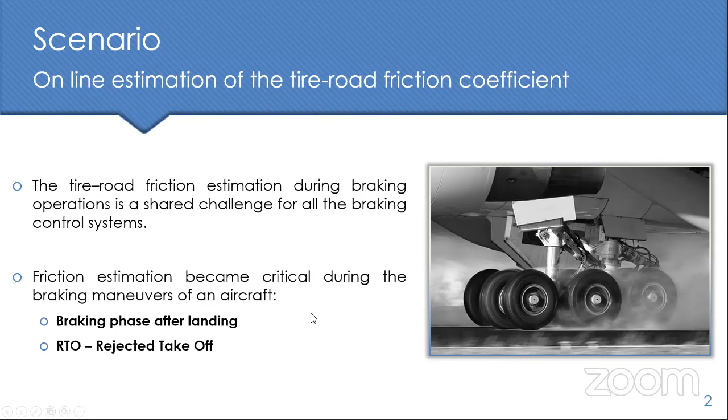So to define our problem, first we pay attention to the friction model. In the literature, the wheel friction model assumes that the longitudinal tire force is given by the product of 2 main components, a nonlinear function mu(lambda) and a vertical force Fz acting on the center of the wheel. So for the sake of the estimation task...

The tire model can be simplified starting from 2 main hypotheses. The first is that during the braking maneuver, the motion of the airplane occurs along a straight line, which has the same direction as the runway. And usually the brakes are located on the rear wheels of the airplane, so there is no direct steering.

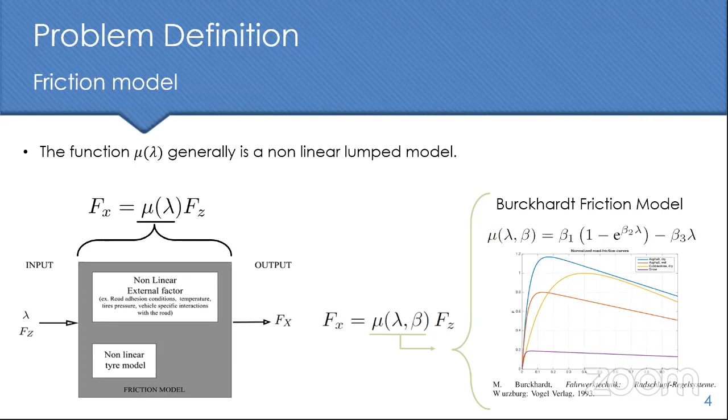Generally, the function mu(lambda) represents a nonlinear lumped model for all the phenomena characterizing the actual road tire friction. In particular, in this case, we use the Burckhardt friction model, which depends on the variable lambda, the longitudinal slip value, and which is parameterized by 3 different betas. Usually the Burckhardt friction model describes 4 different road conditions: dry, wet, cobblestone, and snow.

And finally, to define our problem, we also used the quarter car model, just for the sake of the estimation problem, to model the aircraft's dynamics during the braking phase.

And referring to the Burckhardt friction model, we also define the longitudinal slip, which is a variable that is bounded usually between 2 values, 0 and 1. 0 means there is no slip, and 1 means that the wheel is locked.

It depends on 2 main speed measurements: the aircraft speed and the wheel speed, coming from the aircraft sensors. So remembering the shapes of the Burckhardt curves, which have a local maximum, we define the optimal friction value, the maximum value for a given friction curve, and the optimal slip value, the associated slip value.

So we wanted to design a real-time algorithm yielding the estimate of lambda star, which is the optimal slip, using the measurements of the two main velocities, the aircraft speed with respect to the ground, and the wheel speed.

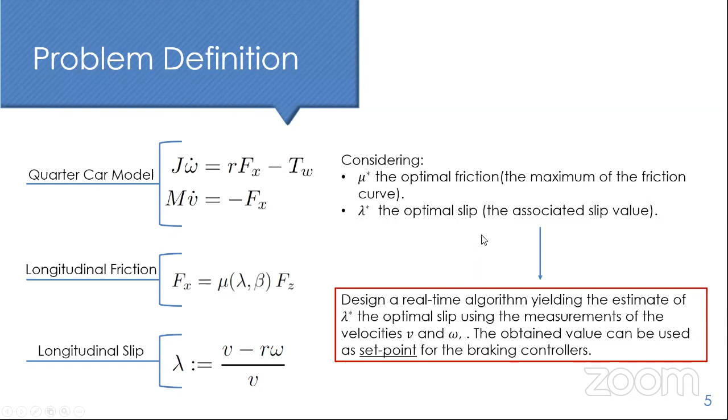And of course, the obtained value can be used as a set point for the braking controller in a closed loop scenario. To do that, we use this estimation scheme where the core of the estimation block is an artificial neural network, in particular the multi-layer perceptron regressor.

We collect during real-time operation a set of pairs lambda-mu, collected during braking operations. This is possible through the knowledge of the two speed values coming from the aircraft sensors and by performing a model inversion. And the idea is that if the relationship between lambda-mu pairs and the surface, which is unknown, can be captured, it's reasonable to extend the estimation function to predict the optimal slip directly.

And of course, the availability of the optimal slip estimates allows us to benefit from a slip controller scheme. In fact, the predicted value of the best slip coefficient can be used as a set point for the controllers.

In this case, we analyzed two different regulators, the PI regulator and the sliding mode controller. The aim of these regulators is first to limit the braking effort requested by the pilot, and then to keep the slip value at the set point, which is the lambda star coming from the MLP.

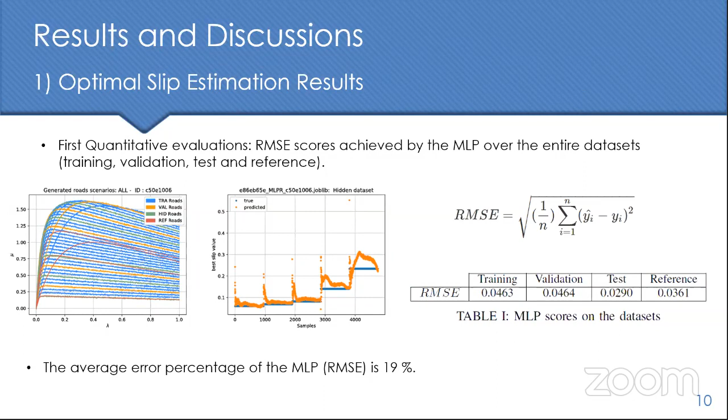Talking about the first test, this is a quantitative evaluation based on the root mean square error scores achieved by the MLP over the entire dataset and subsets: training, validation, test, and reference. From Table 1, the obtained results show that the MLP estimator is able to generalize, since the test and reference sets are excluded from the training phase, and the reference dataset contains only the Burckhardt default roads: wet, dry, cobblestone, and snow. The overall performance for the test and reference datasets is higher than that obtained for the training and validation datasets. In general, the average error percentage achieved by the MLP is around 19%.

For time reasons, we report only the closed loop results.

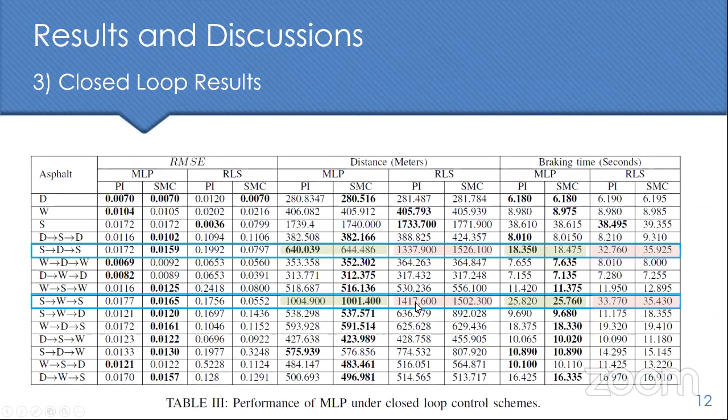To wrap up, this work proposes a data-driven strategy to estimate the optimal slip value and perform efficient braking control. We used an artificial neural network, in particular the MLP, and proved that it can efficiently detect road conditions by processing sequences of slip friction pairs. The synthetic experiment results also show that the proposed approach achieves better performance, in a synthetic environment, compared to the state-of-art recursive least squares approach.

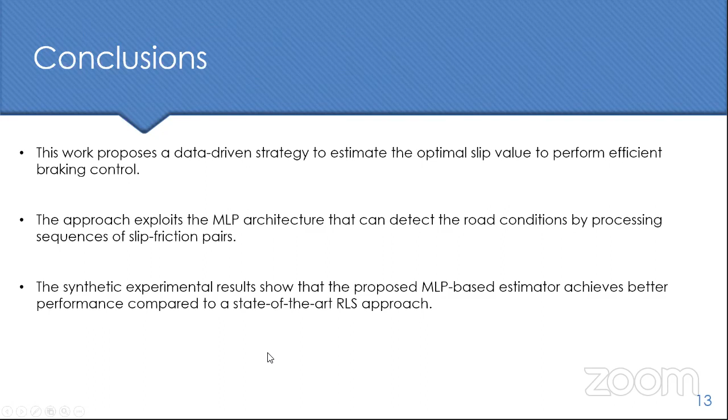Thank you very much for your nice presentation. We finished a couple of minutes in advance of the scheduled time, so we have almost 6 or 7 minutes for questions. Is there anyone who wants to ask questions? So for now, no questions. I have one or a couple of questions. Can you hear me?

Regarding the PI and sliding mode controllers, you don't have a mathematical model of the system. So the question is related to how to tune the controllers. In particular, regarding the PI controllers, probably a heuristic, trial and error approach has been used.

Yes, for the sliding mode controller, we followed the approach used by Riccardo De Castro, who used the sliding mode controller for the recursive least square strategy, and we used the same configuration he used. For the PI controller, as you said, we used an empirical method. That's because the idea is to use this regressor and approach for an estimation task, like a smart sensor.

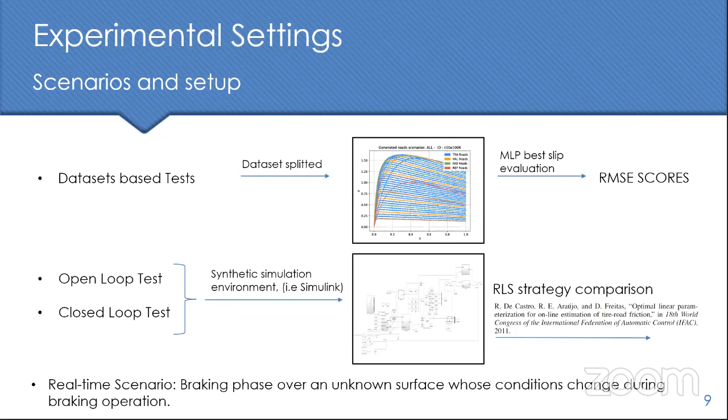Of course, in future work we'll analyze the impact of different configurations for the controllers. Because, for example, the spikes come from both the training phase transitions, and the controller can of course improve or decrease the overall efficiency of the estimation, because they are connected.

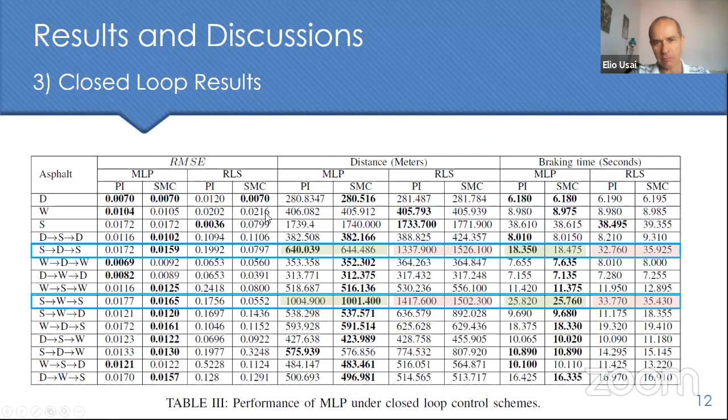My question was very similar to yours regarding the differences between the controllers, since I almost see no difference between PI and sliding mode. So my question was, what is the sliding variable and what is the error signal for the PI? Because it's not strange that two so much different controllers have such similar behavior. So that was my question and my doubt in the presentation, very similar to that of Lino.

Yes, I think we tuned our PI controller to reach the same results as the sliding mode controller, but I think the results came from the environment simulation, because the model is very simple - we use the bicycle car model, and we also use only a white Gaussian noise for training the dataset. So we don't add noise that could probably show better the difference between an approach with the sliding mode controller and the PI controller.

So basically it's the same. And of course, the initial brake effort requested by the pilot is kept equal and constant for all the simulation. Probably in a more detailed and complex simulation, where the braking effort requested by the pilot may change, we will see a stronger difference between the sliding mode controller and the PI controller. And of course, this is a synthetic simulation just to show the estimation capabilities of this approach.

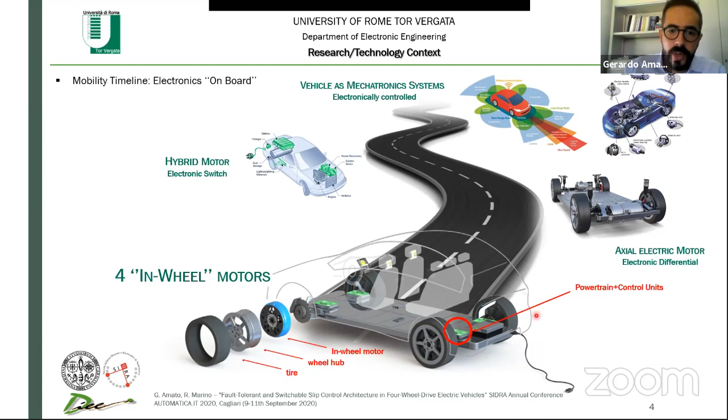On a virtual timeline, starting from vehicles with mechanical parts electronically controlled, like the steering or the throttle, the electric powertrain moved ahead through hybrid motors until other configurations with one or two traction motors, for example. The technological edge in the automotive industry is reaching the configuration with 4 independent electric wheel motors. They are so called because they are exactly housed inside the wheel hub with its own independent powertrain control unit coupled, which is the configuration we considered in our design.

Generally speaking, a fault-tolerant control design is placed in the frame of the robust regulation problem. At the system layer, the goal is to cope with some actuator or sensor faults as disturbances. The problem of nominal performance saving during the failure is addressed sometimes by actuator grouping, in which once a generic fault is notified, the controller arranges the driving forces to the residual actuator control set, like in this case on the front axle.

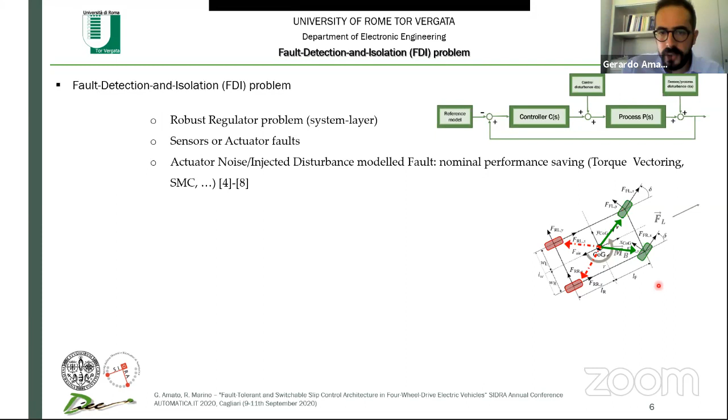Several existing fault detection techniques are based on the loss of control effectiveness as a fault indicator. A wrong characterization can lead to missed detection or false alarm problems, as surveyed in Dumont. Then estimation skills of control algorithms are useful for this goal and can usually be exploited.

Sometimes the fault is a state variable to be observed. In some others, like in Marino 6, the motor parameter identification is used to isolate the fault, which is asserted when that parameter, for example the stator resistance, is out of acceptable bound in the parameter estimation.

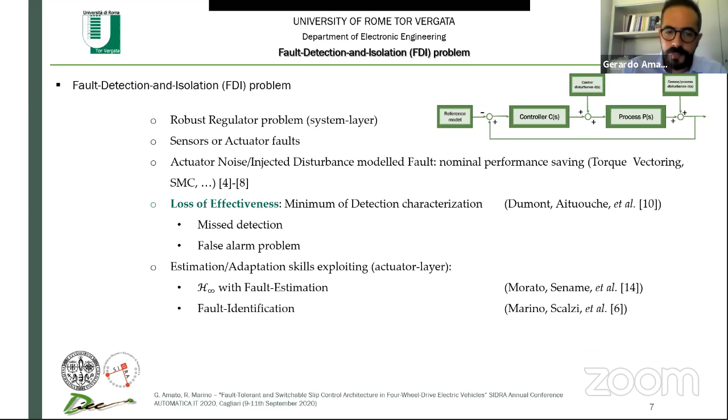An attendant problem thus is the reconfiguration practice of vehicle trim due to the fault. In Cato, a solution for a switching mechanism for 2WD is patented for combustion vehicles, where the mechanical transmission from a central engine can optionally switch between different transmission states by connecting or disconnecting configurable reduction differential gears with electronically controlled switches.

The idea behind our work is to exploit the intrinsic robustness of the 4 independent controlled wheels to implement two main features for the controller towards the preservation of nominal torque balancing. The first is a quick fault detection and isolation capability, FDI, and second, an integrated smooth switching function, SS, from 4 in-wheel motors to 2 in-wheel motors cases once the fault is identified on the axle.

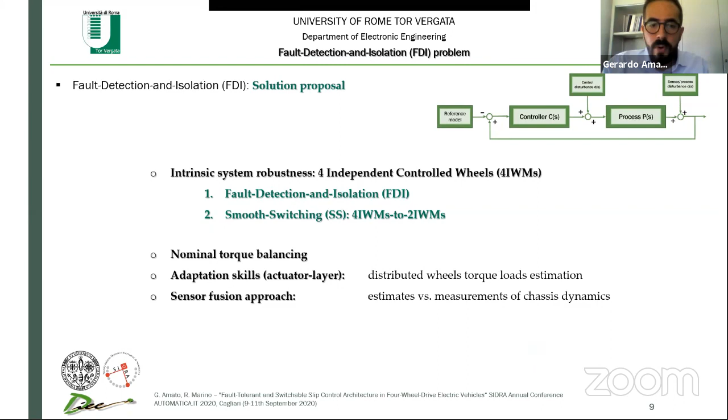Adaptation skills of the actuator layer are used to perform a sensor fusion approach as follows. The model considered for the control design contains the 3rd order XYR dynamics plus the 4-wheel speed dynamics omega, with the forces modeled using the Pacejka magic formula.

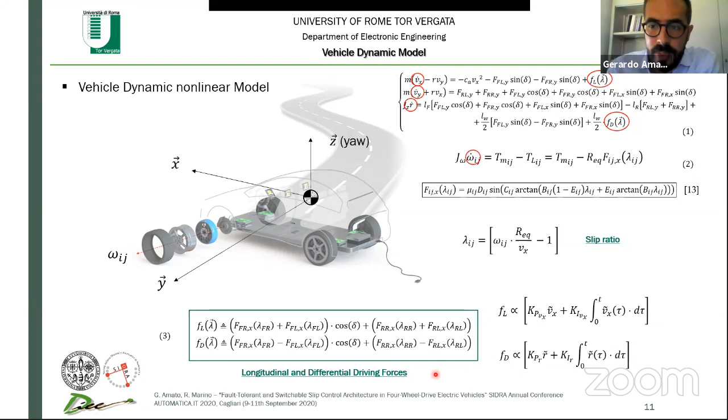From the cooperation of the 4 in-wheel motors, 2 force terms appear as PI controllers, respectively at the longitudinal speed equation Vx and at the yaw rate dynamics R, namely FL and FD, the longitudinal and differential driving force contributions respectively. The sensors in the system are 2 accelerometers to measure X and Y acceleration, a gyroscope for the yaw rate, and 4 encoders for the 4 wheel speeds.

The proposed strategy is borrowed from the multi-layered architecture of Amato Marino 3, in which 2 additional links between the extreme layers branch forward the FDI-SS selectors for the fault detection task. The algorithm works as follows.

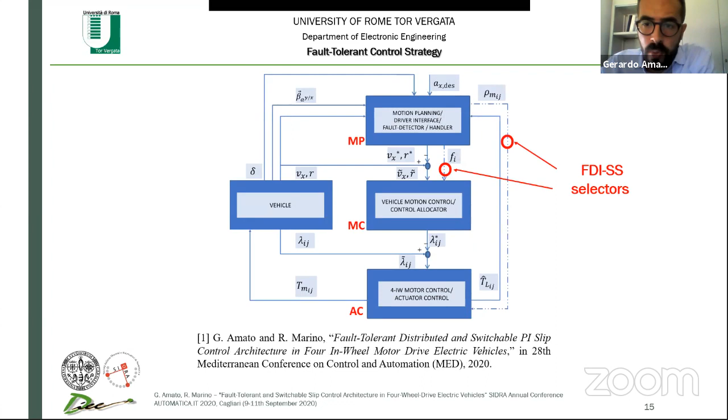At the lowest layer, the 4 independent actuator controllers work as the in-wheel motor controllers. Each individual slip controller produces 2 decoupled input currents, ISQ and ISD, to the rotating frame model of the wheel motor to control both the motor tracking of the slip lambda and the magnetic flux psi RD references.

In Amato Marino 3 the slip control stability was already proved, so that the resulting electromagnetic torque TMIJ implements a PI loop on wheel speed dynamics, and at the same time, by providing the integral part, the estimation of load torque acting on the wheel at runtime in order to compensate it.

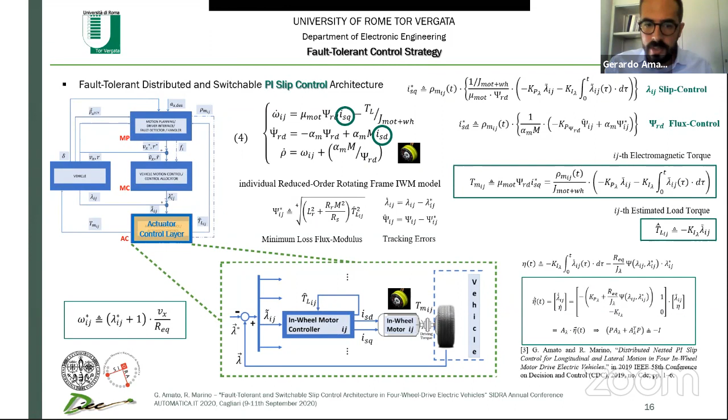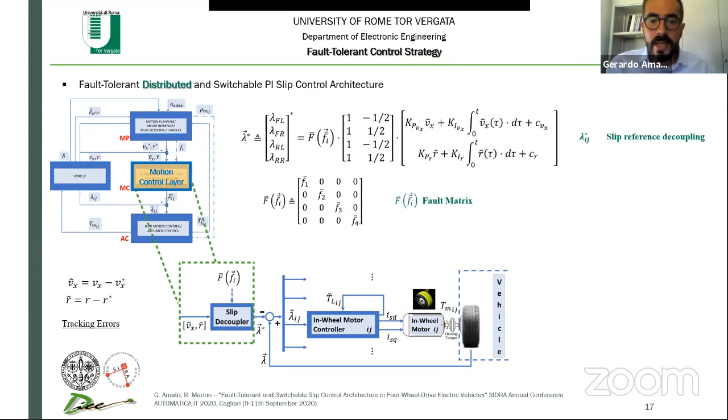The slip references are given by the motion controller MC at the intermediate layer, in which a slip decoupler produces 4 lambda IJ star references with an equalization of the 2 longitudinal and lateral force controllers, respectively the PIs on Vx and R errors, depending also on a fault matrix F, which acts as an insertion matrix.

At the motion planning layer, the algorithm works in two phases. The first phase is the FDI, fault detection and isolation, in which the fault is detected and isolated on the basis of a sensor fusion. The difference between the measured acceleration vector beta and the vector of transferred load gamma is evaluated.

Gamma is calculated from the mapping of individual estimated load torques on wheel through the estimated force vectoring, and then the two accelerations result in the estimated acceleration. Once the fault is detected, a mutual comparison between coaxial twin wheels leads to understanding rapidly on what axle the fault is located, for example, by a mutual comparison between the rear load torque.

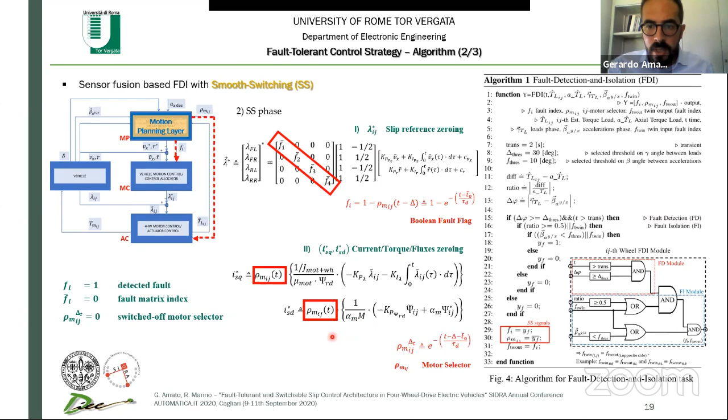The second phase is triggered when the fault is detected and the smooth switching function works. The branched FDI SS selectors are generated as exponential signals. At first, the fault boolean flags FI act as a slip switching signal, so that the detected fault produces a zero index in the matrix where the fault is, while the corresponding control currents are switched off by the rho IJ selectors.

The selected scheme for FDI tasks results quite fast due to the relevant rolling load transfer on coaxial wheels, so that the imbalance on coaxial wheel load can indicate a problem, as well as unexpected saturation or slipping. The detection robustness is entrusted to the redundancy of decision-making flags. In fact, the three decision layers are related to three hierarchical AND gates based on global and local variables, respectively.

On the chassis layer, we are looking at the difference between the measured acceleration vector and its estimate. On the actuator layer, we are looking only at the comparison of wheel load estimates.

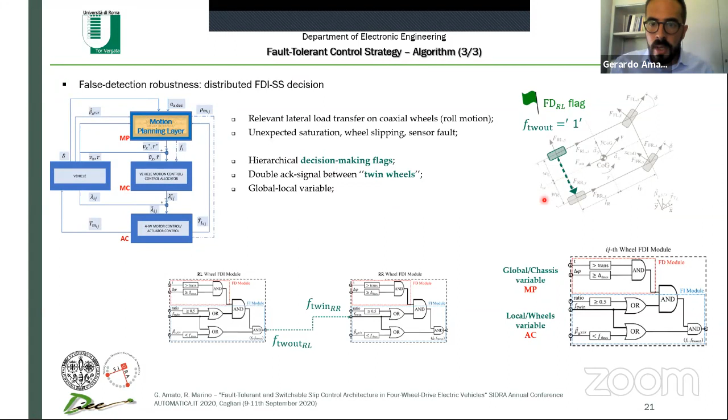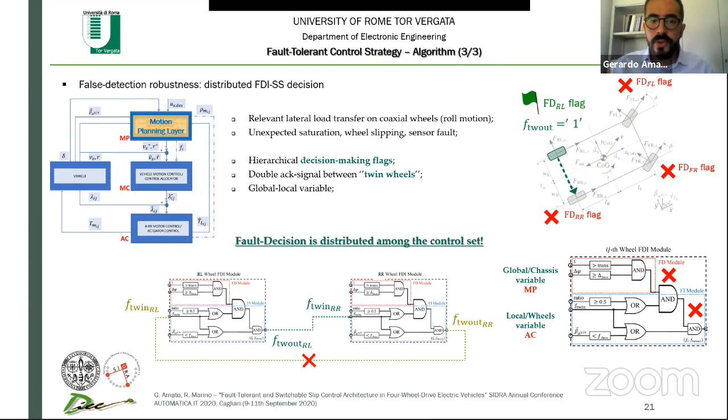An example: some software errors could produce a fault flag on a wheel, which communicates the error to its twin with an F twout output. Even if this could indicate the error occurrence, the fault event is not triggered if at the aggregate decision layer, the global fault detection flag is not agreed by all FI modules, thanks to the hierarchical ANDs. Then the fault decision is made distributed among the control set.

The proposed control strategy is validated with a CarSim simulation of a vehicle cruising at a constant speed on wet asphalt. We considered a generic mechanical fault designed as a sudden incoming loss of load on the rear left wheel, which the motor should compensate. The fault produces a sigma scaling factor appearing on the wheel torque down to 20%, due to an angular or linear miscalibration, for example.

The test is conceived to show the rapidity of intervention of the FDI and switching routines from 4WD to 2WD cases, once the fault is isolated on the rear axle.

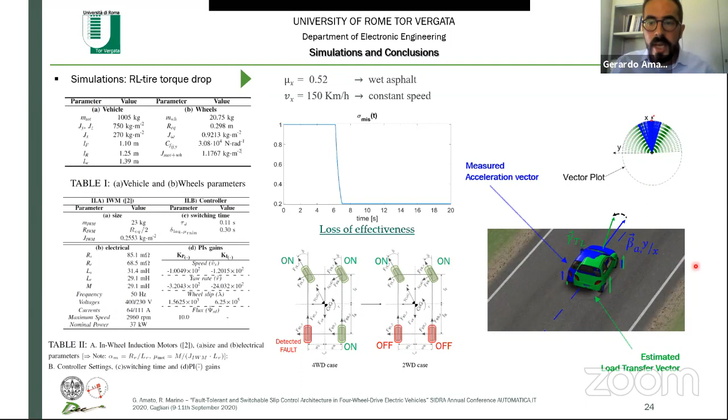The fault detection task every time looks at the difference between the measured acceleration vector, the blue one, and its estimate, the green one. These are two independent vector acceleration evaluations which must agree. At the beginning, they are aligned. So when the estimated acceleration vector goes out of an acceptable cone, an acceptable range around the measured one, it means a fault occurred.

In this short video, the blue vehicle, which is the real one, is cruising, while the green one represents only an estimation of the heading motion. At the fault occurrence, the estimation falters, and so the estimated vehicle heading moves sideways.

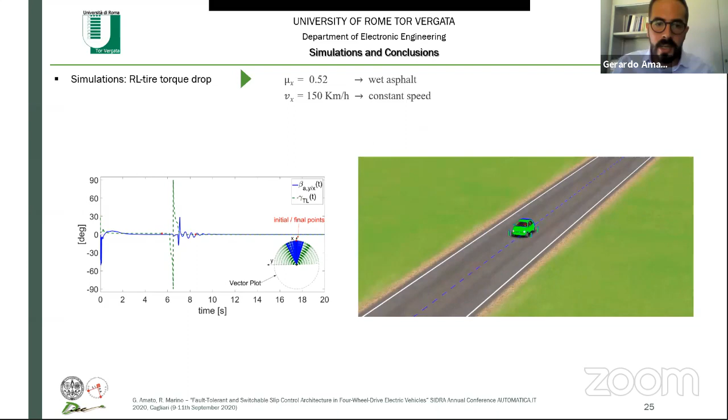This is because the faulted angle gamma, the green one, is spanning in plus minus 90 degrees, while the measured vector beta, the real one, is inside only plus minus 30 degrees. Then the two vectors coincide again only when the system recognizes the actuator failure, like at the end of the video, and after it transfers all the powertrain onto the front axle. Then the vehicle balancing is restored again at the end.

Step by step, the algorithm works as follows. At first, the fault is detected when the acceleration vector estimation error crosses 30 degrees.

Then in the fault isolation task, the modal ratio between coaxial load torques are polled. When at least one ratio crosses 50%, or a wheel receives as input an F twin equal to 1, the fault is isolated on the axle. A last check is done on the acceleration vector angle beta to understand if the load imbalance is caused by a steering maneuver. In this case, there is not a steering maneuver, and then the fault is accepted.

Finally, the SS signals are triggered at the same time on the twin rear wheels, rear left and rear right. Then the fault indicators are zeroed in the matrix, as well as for the current parameters, motor selectors. Thus, the rear slips, the rear currents, and the rear fluxes of the motors are zeroed.

And then the motor torques are zeroed for the faulted wheels. The cooperative architecture allows transferring the control action transparently from 4WD to 2WD, thanks to the integral contributions, without the need of reconfiguration. The integral action will then automatically find the new operating condition, so the torque value of residual control set is augmented for the front wheels in order to compensate the loss of the two actuators.

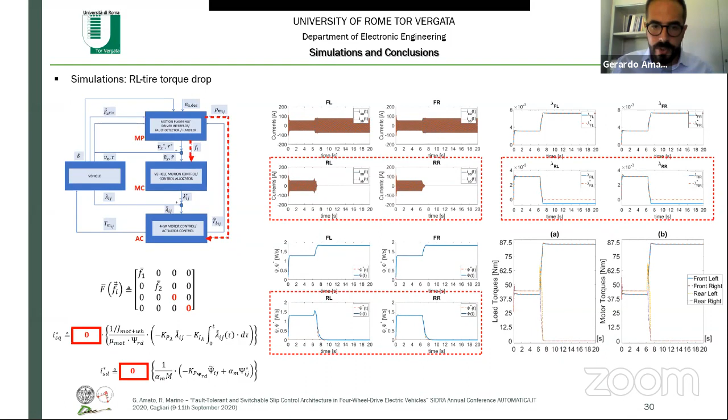Consequently, chassis motion tracking, viewed as the nominal performance target, is preserved without perceivable macroscopic effects. As you can see, there is a very small error.

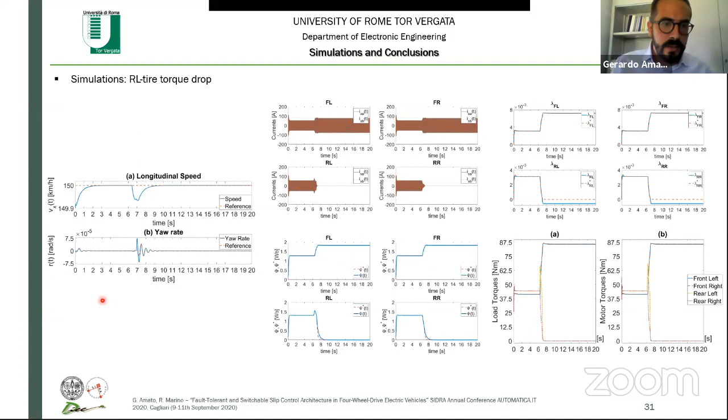In conclusion, the work deals with failure detection and isolation in a four-wheel motor configuration with distributed and switchable architecture. The independent 4PI slip loops provide cooperative chassis motion control and distributed load torque estimation. A sensor fusion approach is used for fault detection by observing the difference between the measured vehicle acceleration and its estimate. Then the four estimated load torques at the motors are mutually compared so as to identify quickly a mechanical failure on the axle in less than 1 second, while the switching command is given in 0.1 second.

Namely under typical driver reaction time. The failure is shown to slightly affect the longitudinal speed and yaw rate, but the control is capable of quickly compensating it.

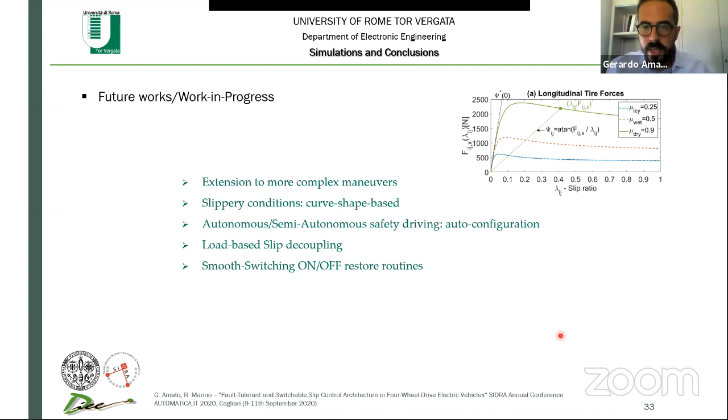As future work, we consider extending the test to more complex maneuvers like a bending maneuver or acceleration or braking, while the distributed wheel load estimation allows us to depict the wheel curve shape by combining slip and torque information. The auto configuration features could lead to interesting applications in the frame of autonomous or semi-autonomous driving.

A load-based slip decoupling could be considered to improve the vehicle road grip in the case of a different torque balancing during a curve or during an acceleration. Finally, the switching ON/OFF restore routine can be implemented too when the estimator recognizes the fault.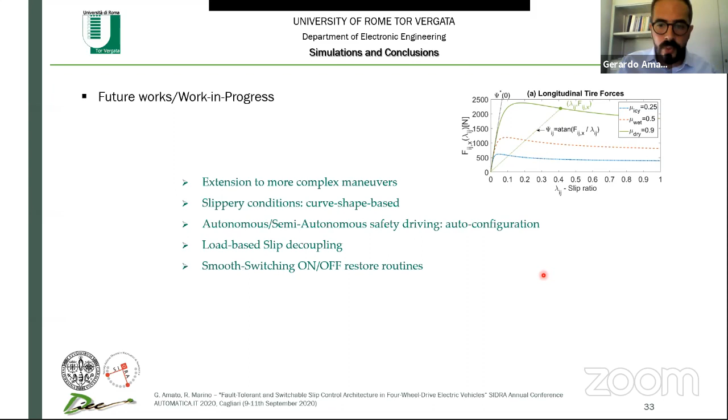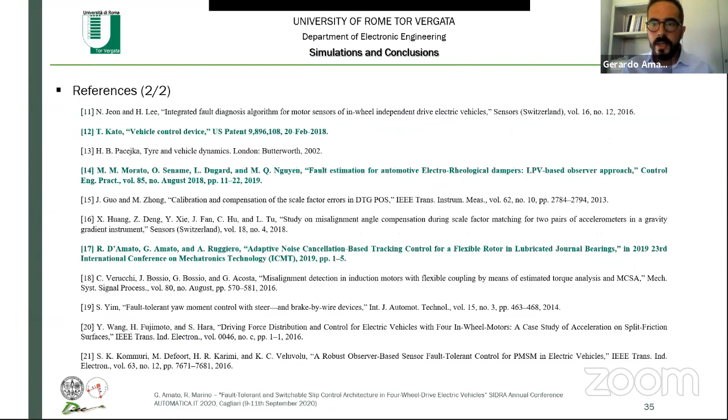Thank you for your nice presentation. If you have any question, you can book for asking in the main chat. I think that no one asked any question till now. I think we have time just for one.

Okay, just a curiosity regarding the model of the CarSim model, the parameters of the CarSim model. How did you set the parameters? And is there the opportunity to perform some experimental testing?

Okay, we considered, just for sake of adaptation to the market, a subcompact vehicle in which the wheels are small for a subcompact city vehicle. And then the main feature of the controller is that the wheel torques are not based on the knowledge of wheel parameters.

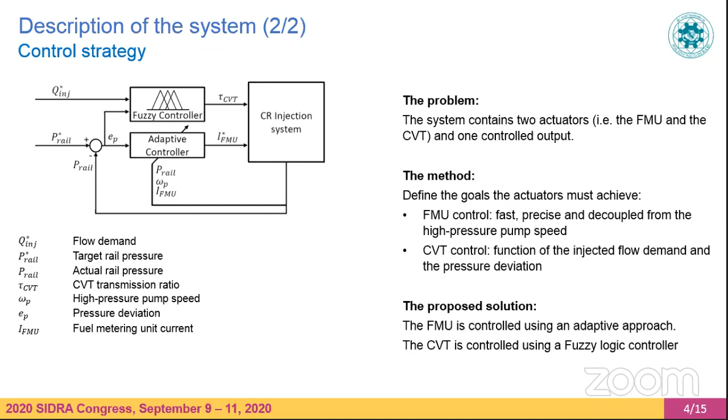Going deeper in the control loop definition, first of all we started from the solenoid valve control. We used an adaptive approach, in particular a model reference adaptive controller, based on the pressure dynamic equation in the common rail that, as well known from fluid dynamics, can be evaluated as the sum of the flow that comes from the high pressure pump and the flow that is injected into the combustion engine.

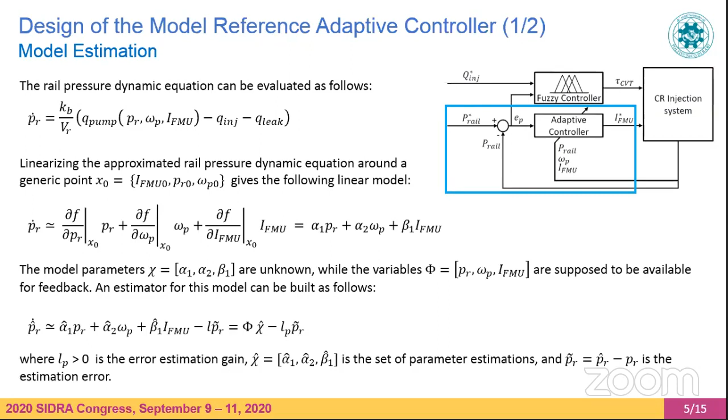or goes through as leakage through the injectors. By linearizing this equation, we are able to build up an estimator, a linear estimator for this model, and using the Lyapunov approach, we can derive a control strategy for the current of the solenoid valve.

As we can see, we can also include the speed of the high pressure pump in the... I don't know if you can see the pointer of the mouse. Probably not. Yes. In any case, okay.

By using this component in the control loop of the current, we can include the high pressure pump. So one of the goals that we defined previously was the decoupling from the high pressure pump, and this is exactly what happens by using this control loop.

Switching to the other control loop, the fuzzy controller: first of all, the fuzzy control design starts from the variables that are the input of the fuzzy controller, and the rules, as fuzzy logic theory teaches, that we want to implement inside the controller. So first of all, we designed the membership functions.

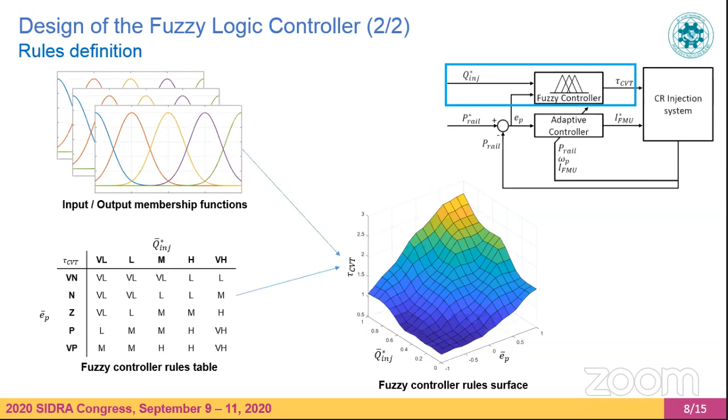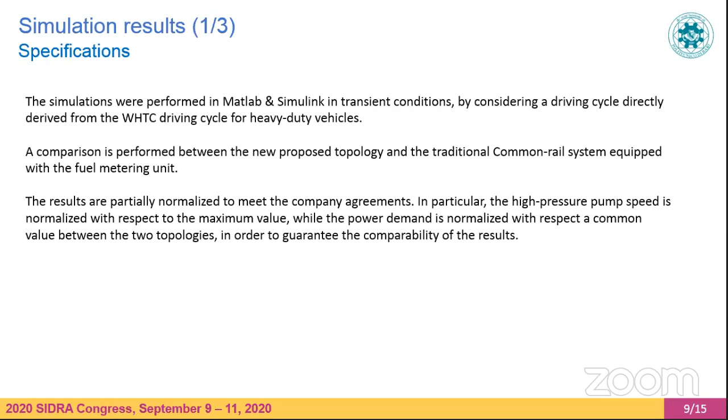Then we perform some simulation. By using this approach, we used a real WHTC driving cycle for heavy-duty vehicles, and in order to compare these results with the traditional system, we compare our system with a fuel metering unit control loop. The results we are going to see are partially normalized to meet some company agreements, in particular all the information related to the high pressure pump, specifically the high pressure pump speed and the power demand.

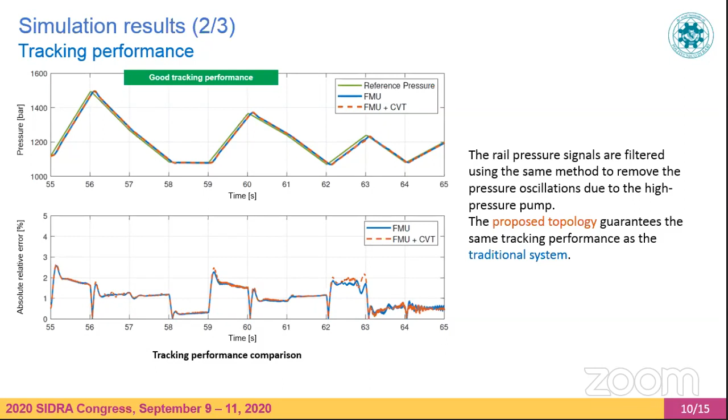First of all, we are interested in the tracking performance, which must be the same as the traditional one. We can see that this control system guarantees the same tracking performance as the traditional system.

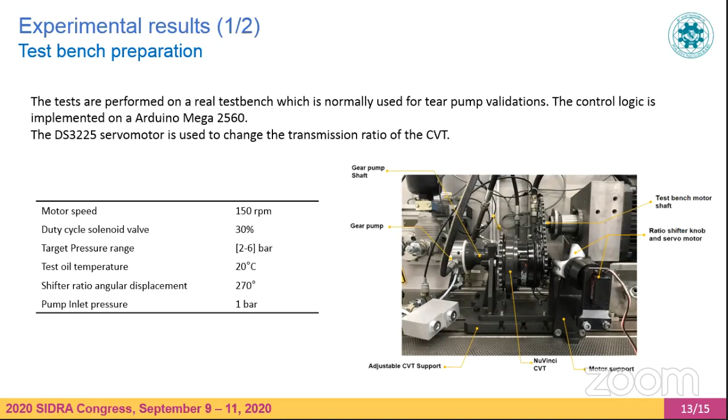Then we tried to implement a control system on an Arduino Mega because of the performance of the board. We were able to use a PID controller, and with this simple controller, we were able to reach a good tracking performance, which seemed to be very, very good.

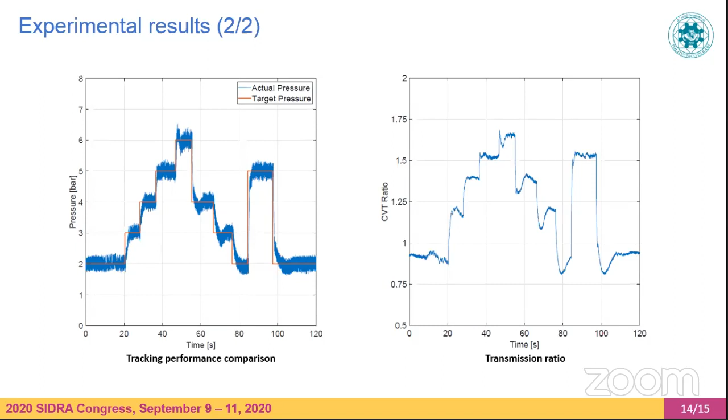This gives us the possibility to continue our investigation on a real test bench, because as you can see in the conclusion, the future development that is already ongoing is implementing this concept on a real common rail test bench with a real high pressure pump and also injectors. The presence of injectors is important because it represents a real disturbance on the common rail pressure control loop.

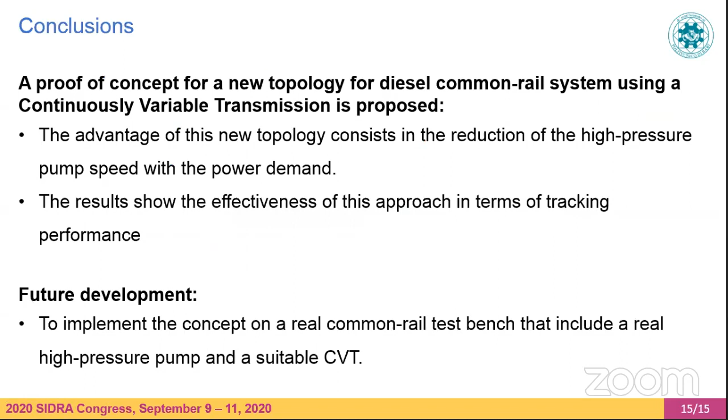And maybe the most important thing is that the mechanical power necessary to drive the high pressure pump is strictly related to the pump speed, because of internal friction and fluidodynamic effects. So by reducing the high pressure pump speed, there are a lot of advantages, and this is one of the achievements of this work.

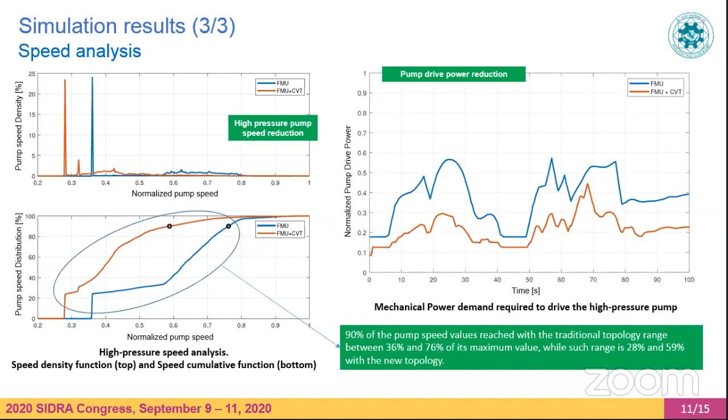In some common rail systems we use the so-called PCV, a valve mounted directly on the rail. This valve is used to discharge the rail when a fast decrease of pressure is needed. This recirculation is a bad effect, because the high pressure fuel comes with a very hot temperature into the tank, which can cause other problems. So you also have to use power of the pump to raise the pressure back to the common rail value.

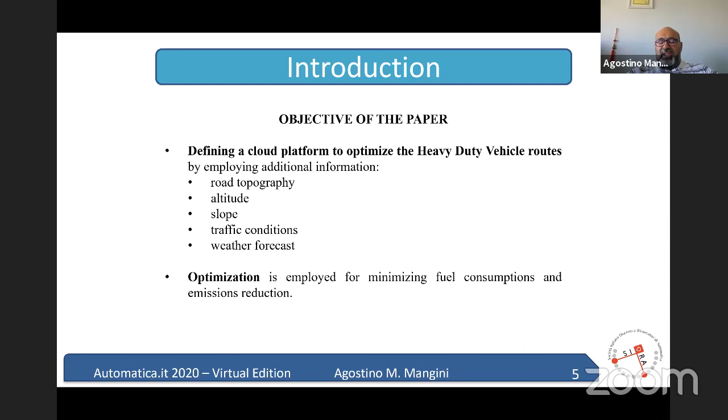For this reason, our research activity was centered on the definition and implementation of a cloud platform to optimize heavy-duty vehicle routes by employing additional information such as road topography, altitude, slope, traffic condition, and weather forecast. Optimization was used to minimize fuel consumption and consequently pollutant emission.

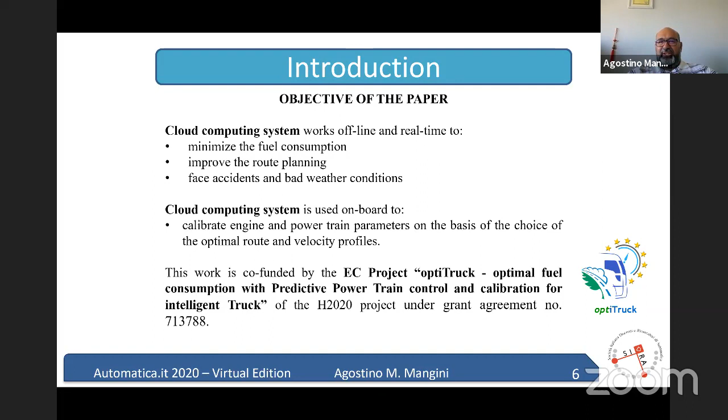The proposed cloud computing system works offline and in real-time after it receives the mission from the fleet management company. The cloud system determines the optimal route that minimizes fuel consumption, and improves the routing planning during the mission when facing critical situations such as accidents or bad weather conditions. Moreover, the cloud computing system is used on board to calibrate engine and powertrain parameters based on the chosen optimal route and velocity profiles. This cloud computing system was the objective of the European project optiTruck.

Now I will show the system architecture. The cloud platform architecture is composed of a set of software components divided into two main optimization modules that work in a coordinated fashion under the name of Global Optimizer. These two optimization modules are the Cloud Optimizer and the Onboard Optimizer. In our research activity, we focus our attention on the Cloud Optimizer.

The Cloud Optimizer component performs the route planning optimization task. The cloud system data can be divided into three groups: external sources—traffic, weather, maps, and topography, shown in green in the architecture; mission-related data—waypoint, payload, driver, and maximum arrival time, loaded by the fleet management company; and real-time data—truck position, speed, consumption, and real slope.

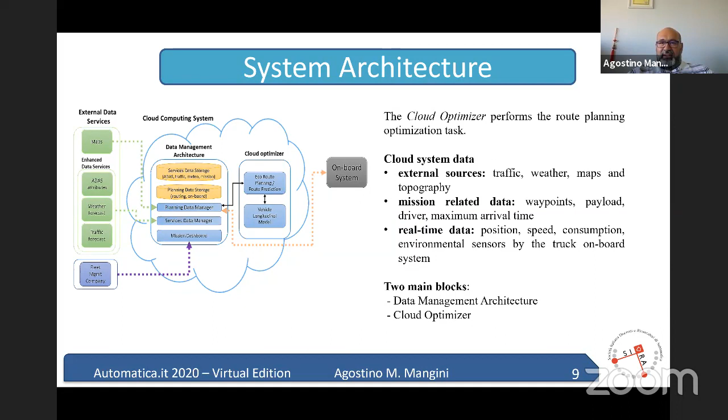Now we describe in detail the activity of the data management architecture, one of the main blocks of the architecture. The data management works with big data from external sources and real time data from the trucks.

The main components forming the data management architecture are the data storage components, in yellow, which collect all the raw data from external sources and trucks, and the business intelligence logic component, in blue, to integrate and fuse the data set.

Among the data storage components, service data storage is responsible for storing input data from external sources and mission data from different data sources: topography data, ADAS data, traffic forecasting data, weather forecasting data, mission and truck data. Then the planning data storage is responsible for storing the output data, such as the computed best route and the data from the truck.

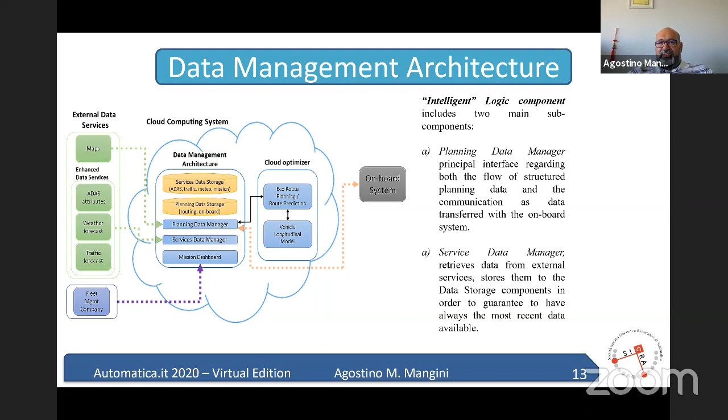On the other hand, the intelligent logic components include two main subcomponents: the planning data manager, which manages the data flow and communication with the truck, and the service data manager, which retrieves data from external services and stores it in the data storage components, in order to guarantee the most recent data is always available.

Now we present in detail the Cloud Optimizer, the focus of this presentation, and the steps to calculate the eco route and the velocity and gear profile.

The Cloud Optimizer component determines the optimal route of the truck to reach the destination by minimizing fuel consumption and optimizing the route velocity profile. It is subdivided into three subcomponents that we'll detail in the next slides: the route network selector, the velocity and gear profile calculator, and the route optimizer.

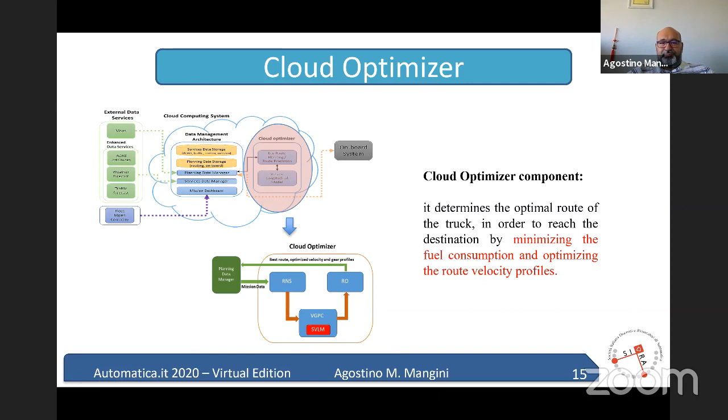The operational activity of the cloud optimizer is described in two different scenarios. In the pre-mission phase, the system calculates the eco-route, optimizes the velocity and gear profile, and sends them to the truck before the mission begins. In the in-mission phase, the eco-route is monitored using real-time traffic and weather data collection. If an accident or severe slowdown occurs, the cloud optimizer recalculates the best route and/or the velocity profile.

As said previously, the cloud optimizer is formed of three components. The route network selector builds the route graph network, collecting the main possible routes from the origin to the destination. In this graph, the nodes are represented by geographical coordinates that identify road crossings.

The velocity and gear profile calculator, on the other hand, integrates predictive traffic, weather conditions, and road topography, including slope and curve radius, based on a simplified vehicle longitudinal model, and builds a weighted directed graph. In this graph, the nodes identify admissible velocity and gear. Finally, the route optimizer determines the optimal eco-route, minimizing fuel consumption by using the built weighted directed graph and the Dijkstra algorithm.

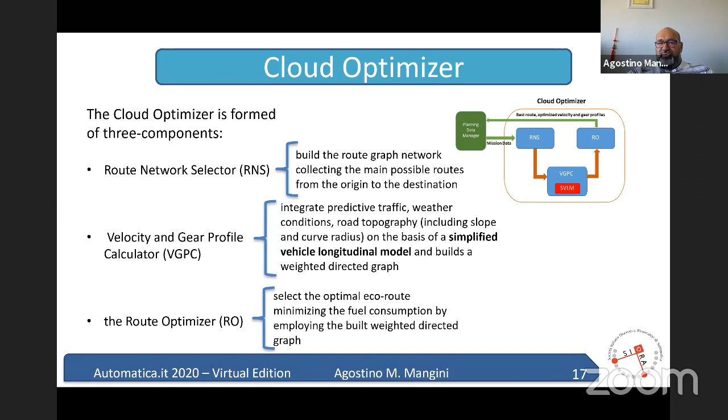The route network selector works in three steps. First, it selects from the maps data the fastest route R1 from the departure to the destination, passing through the waypoints while respecting the mission duration time. Then, M-1 other network routes are selected, connecting each crossing road in R1 to the next waypoint, without completely coinciding with R1.

Then the set of M routes is converted into a directed graph G, where the nodes identify crossings and the arcs identify roads. It is necessary to use an algorithm for this conversion because the road overlaps have to be deleted.

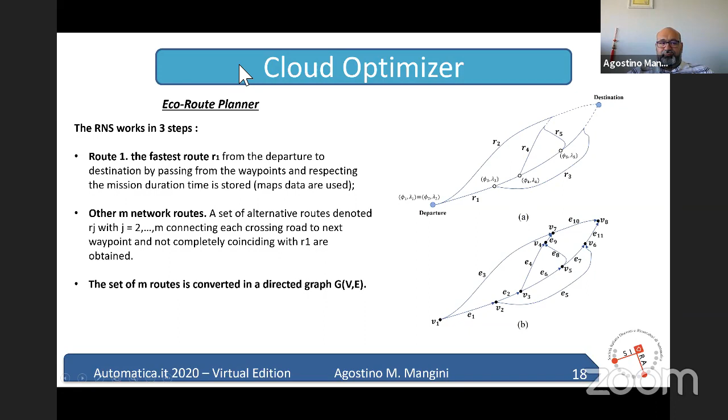Now, the velocity and gear profile calculator. It analyzes each road of G, subdivided into points about 200 meters apart. In particular, the velocity and gear profile calculator determines the admissible velocity and gear profile for each road, considering ADAS data, mainly slopes and curvatures, road limits, traffic and weather conditions, and the payload.

To this aim, the VGP calculator needs a simplified vehicle longitudinal model to quantify the fuel consumption and travel time between two points, based on the truck's velocity and gear. It is simplified because the calculation times have to be limited. We used the longitudinal model introduced by Hellström.

Finally, the route optimizer determines the value of beta and the minimum path of the weighted graph G prime by applying the Dijkstra algorithm. In fact, the road is converted into a graph where the nodes identify a pair of velocity and gear of a point situated at specific coordinates, and the edge weight is given by a function depending on fuel consumption and travel time.

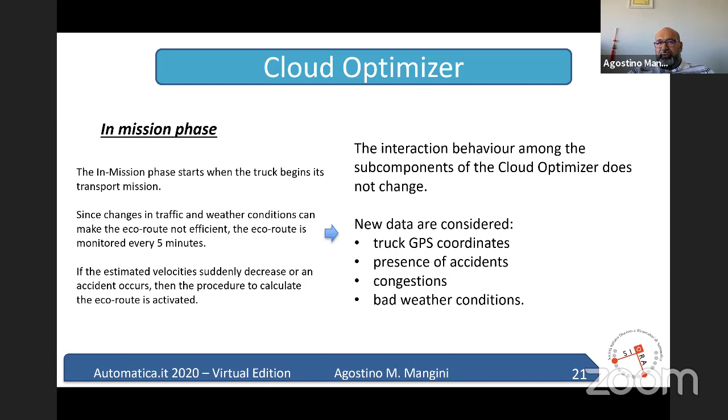So the in-mission phase starts when the truck begins its transportation mission. Since changes in traffic and weather conditions can make the eco route not efficient, the eco route is monitored every 5 minutes. New data are considered in this case: truck GPS coordinates, presence of accidents, congestion, bad weather condition. Moreover, the network is not fully calculated in this phase, but only a mini network is determined in the vicinity of the accidents, using the crossing before and after the accidents.

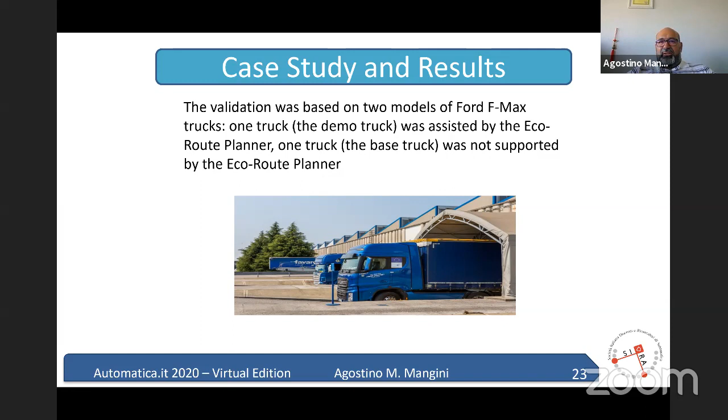Now we show the case study. The validation was based on 2 models of Ford truck. One truck, the demo truck, was assisted by the eco-route planner. One truck, the base truck, was not supported by the eco-route planner.

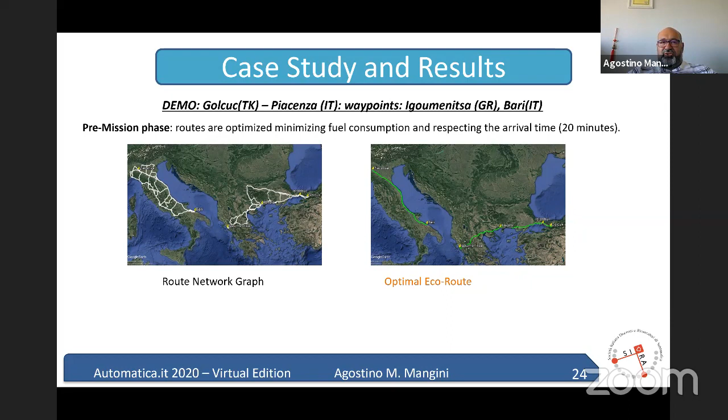The demo was a mission from Golcuk in Turkey to Piacenza, passing through the waypoints Igoumenitsa and Bari. In the pre-mission phase, the route network and the route calculation was performed in 20 minutes. In white, you can see the network, and in green, the eco route that derives from the optimization with the Dijkstra algorithm.

During the demo mission, an accident occurred near Bari, and the in-mission procedure was activated by the eco-route planner. So you can see the mini network and the eco-route that were calculated in 3 minutes.

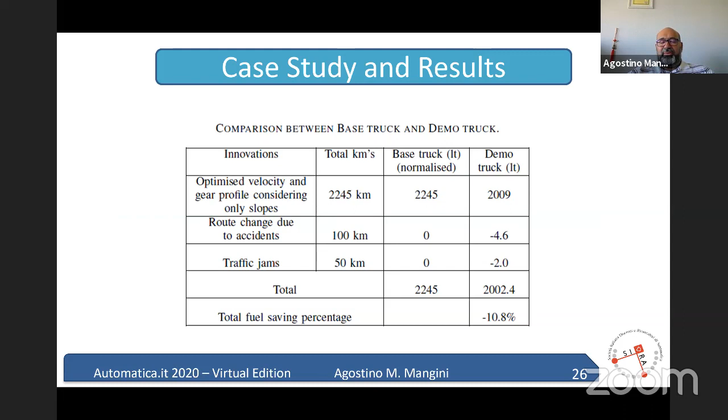These are the final results of the demo. The fuel consumption was normalized in kilometers, and the total fuel saving percentage was minus 10.8%.

So, in conclusion, this paper presents a cloud computing system to support the fleet management company in the choice of routes to be performed by heavy-duty vehicles. The cloud computing system is presented, its architecture, and how the best route and the optimal velocity profile are determined.

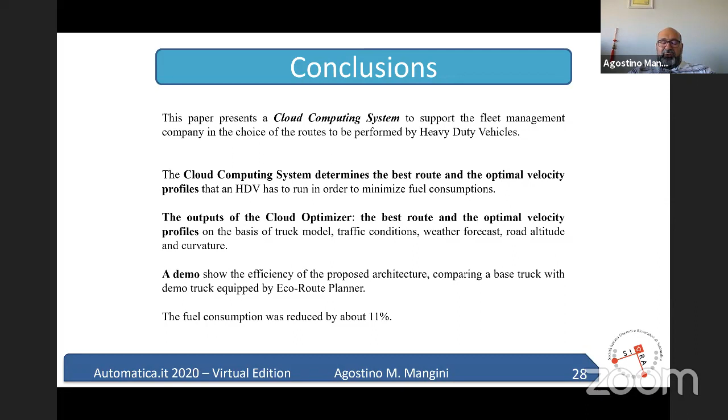Then a demo showed the efficiency of the proposed architecture, comparing a base truck with a demo truck equipped with the eco-route planner. The fuel consumption was reduced by about 11%.

Finally, future works will design the onboard system that will collaborate with the cloud computing system to improve the efficiency of the proposed architecture. Then the onboard system can improve the truck powertrain parameters based on the best route in order to obtain an additional reduction of fuel consumption.

Thank you for your attention.

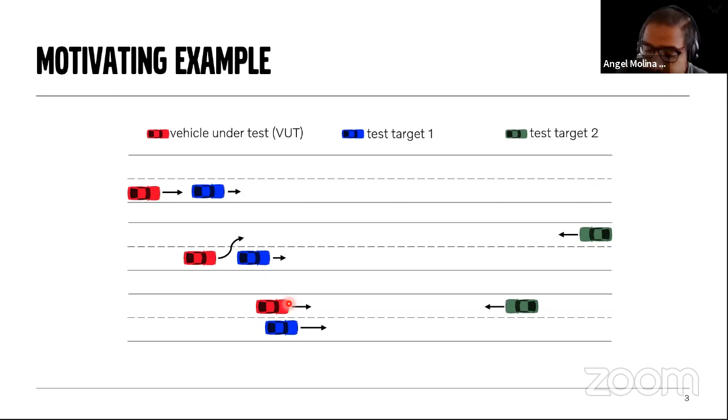So that makes it challenging if we want to make sure we execute a scenario as specified by a certain protocol. To model this type of scenario, we are using a paradigm known as hybrid automata, which is basically a combination of discrete and continuous variables. We have a discrete state that we call Q, associated with the different operating modes or stages in the scenario. We assume we have NQ different modes, and this discrete state is basically associated with a finite state machine.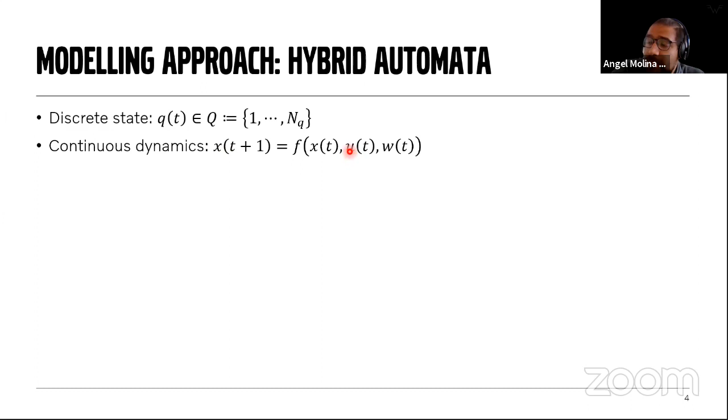But we also have the continuous dynamics. We have a continuous state X, whose dynamics are described by some function F, depending on the state, control input U, and the external disturbance W that captures the states and inputs of the vehicle under test, which are not to be controlled but are actually controlled externally. We also specify additional requirements on this hybrid system: we want to satisfy constraints on the states and inputs to represent the motion capabilities of the test targets, and perhaps also safety constraints.

We assume that the external disturbance is bounded, so we don't know what it will be in the future, or what the states of the VUT will be, but we can measure them at every sampling instant. So we encode the different control objectives throughout the scenario, specifying the control objective as a target set, a subset of admissible states. We want the state being controlled to eventually enter this target set, and all these sets are mode dependent, meaning they can be different for different stages in the scenario.

This graph illustrates how we conceive the scenario as a hybrid automaton. We have the different discrete states, the different operating modes, and transitions occurring between modes when the state enters the specified target set.

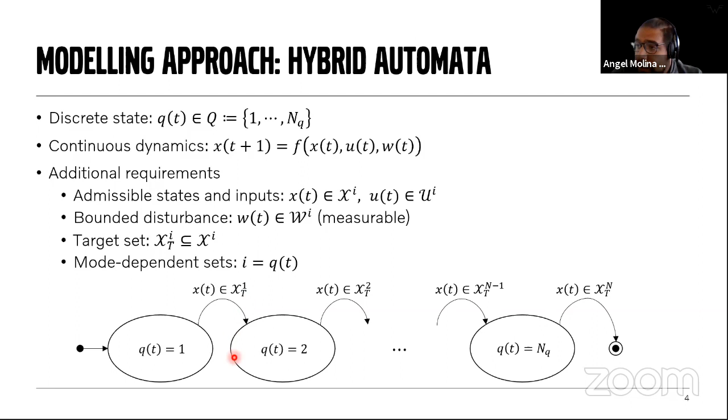Having described this, the problem we're trying to solve is to determine a control input that will make the discrete state Q evolve sequentially as 1, 2, 3, all the way to the last operating mode, while satisfying the mode-dependent state and input constraints, for all possible sequences of the bounded disturbance W. So this is a robust control problem.

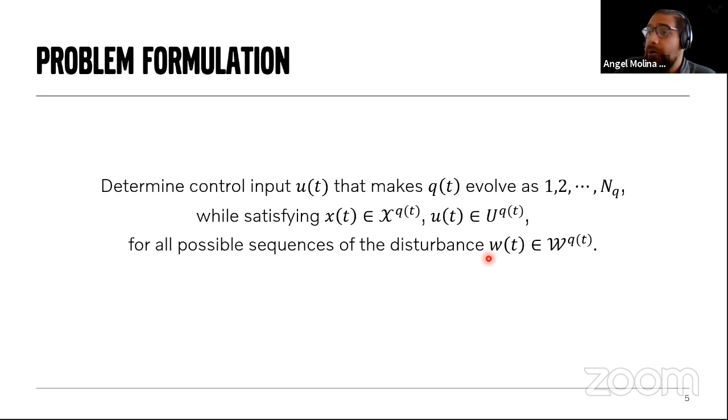Okay, our control approach to solve this problem is basically to subdivide the entire problem into smaller subproblems.

So in this example, we have 3 operating modes. And we have the admissible states represented by squares. So we have 3 different admissible states. We have 3 different target sets.

And the idea is to control the state from an initial condition, x0, into the first target set, and from there into the next target set, and so on.

And we want to do this keeping or making sure that the solution remains feasible. So we want the state to remain inside a set of feasible states from which we can control the state to reach the different target sets.

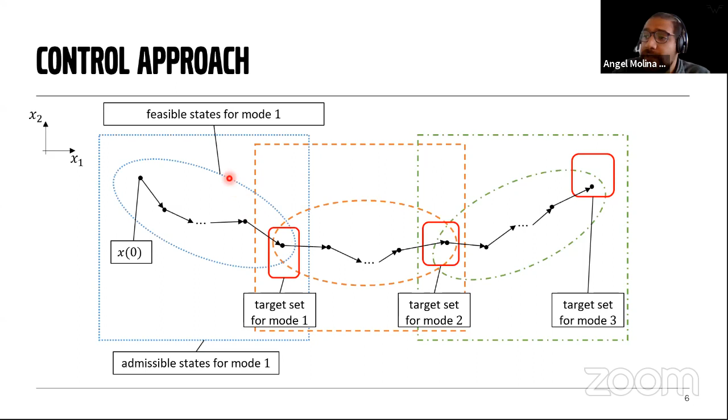So the main question here is how do we determine these feasible states if there are any?

And to address that question, we propose a feasibility analysis that is based on the concept of robust controllable sets or reachable sets.

And basically, we define a reachable set for a certain set S as the states that can be controlled to enter the set S in one time step.

So all the states for which there exists an admissible control input, such that the state will be controlled to enter the next set for all possible disturbances in the bounded disturbance set.

So applying this definition recursively, then we can say that the Kth robust controllable set contains all states that can be controlled robustly to enter the set S in at most K steps.

So borrowing this definition, we then define a set lambda I, which depends on the operating mode, which is basically the intersection of the target set with the robust controllable sets for the next target set.

So let me clarify this. Basically, the set lambda I contains all states in the target set for mode I that can be controlled robustly into the next target set, and from there into the next target set.

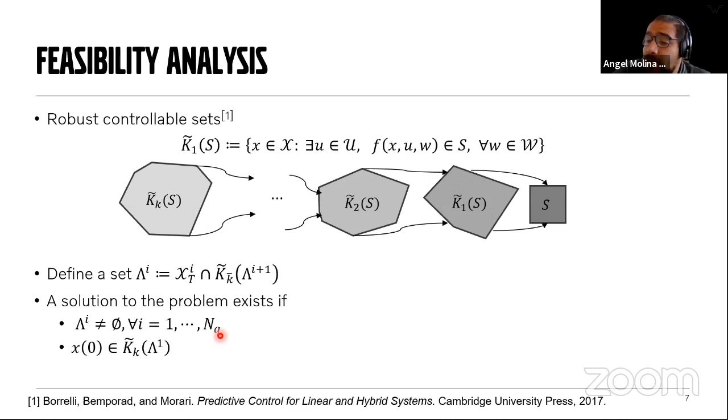So if we analyze and verify that all of these sets lambda I are not empty for all of the operating modes in our automaton, then we know that a solution exists to the problem.

Also, if the initial condition belongs to one of those robust controllable sets for the first target set, this feasibility analysis can be done offline if we have the specifications of the target sets and the system dynamics and constraints.

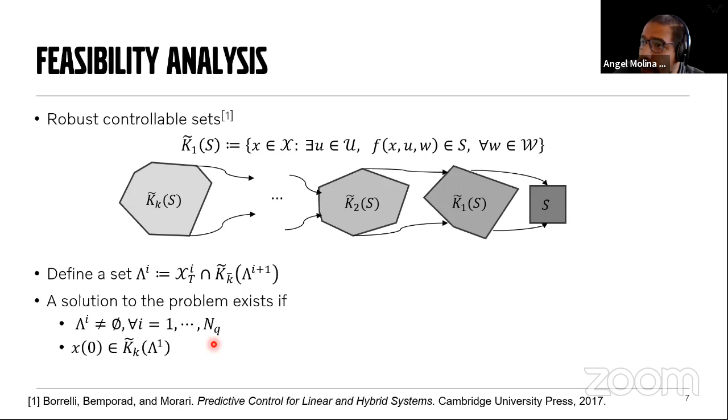And then what we want to do online is to solve a constrained optimal control problem to actually find out what is the input that will achieve or that will ensure the correct evolution of the state.

So we do this by solving a QP problem. So at every time step t, we measure the current state and the current disturbance.

We assume that we can have access to those. And we have to solve an optimization problem to determine an input sequence up to a certain prediction horizon n.

That minimizes a certain cost function and that satisfies input constraints, and more importantly, a set constraint.

This constraint ensures that the next predicted state, the state in the next time instant, will belong to the next controllable set. And well, we solve this optimization problem, and then we apply the optimal control input.

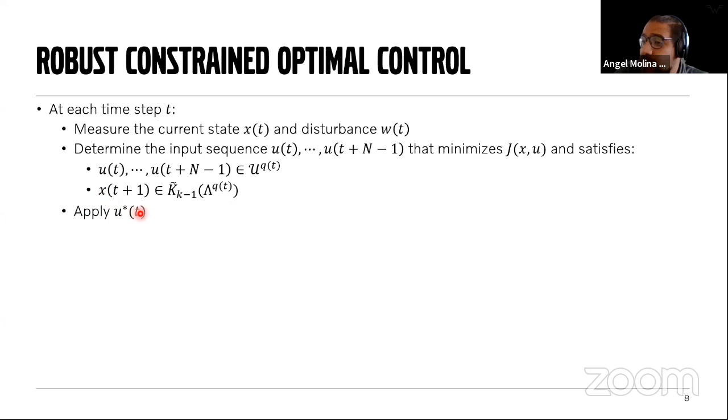So basically, what we're doing is this. We make sure that our optimization problem will keep the state inside of the robust controllable sets, inside of the chain of robust controllable sets, until we can finally reach the target set.

Okay, so let me show a simple simulation example of the scenario that I introduced in the first slide.

So in this simulation, we have the state vector x that collects the inter-vehicle gaps, delta x1 and delta x2, and the velocities of the test targets. The inputs, the control inputs, will be the accelerations of the test targets.

And here we are only modeling the longitudinal dynamics of the vehicles. And as external disturbance, we have the states of only the velocity and the acceleration of the vehicle under test. Those are variables that the control system is not influencing.

And with this choice of states, we can represent the system as with linear dynamics with an additive disturbance if we assume some double integrator dynamics for these states.

So this example scenario consists of 3 stages or 3 modes. In the first mode, targets 1 and 2 will drive within certain speed bounds, and then in mode 2, target 1 will try to stay ahead of the VUT.

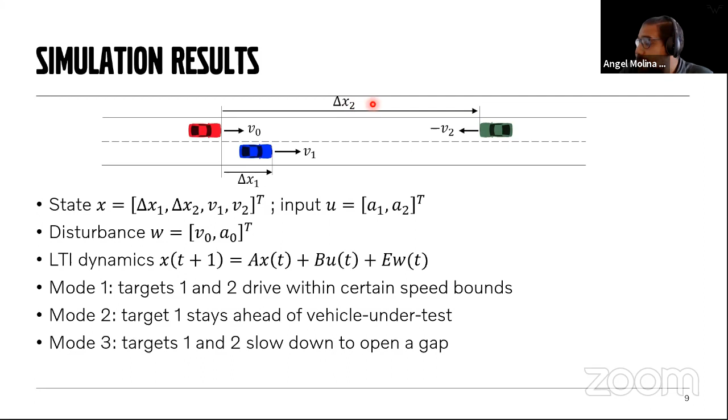In mode 1, targets 1 and 2 drive with certain speeds. Target 2 has to accelerate a bit to make sure it stays within the feasible set of states, and the VUT is driving at a constant speed, then it starts to accelerate to try to overtake. We see then that target 1 also tries to catch up with the VUT.

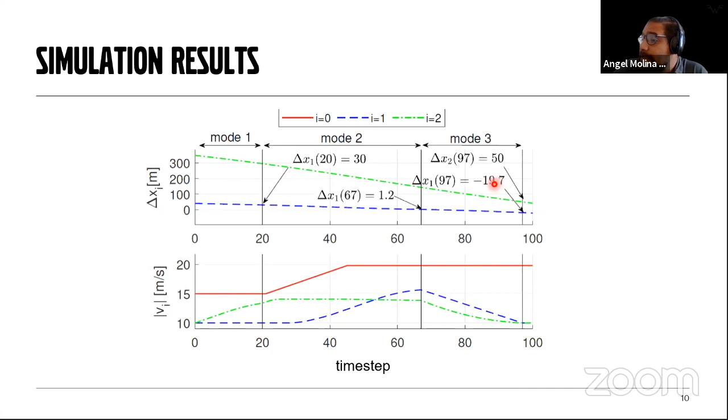During mode 2, the gap delta x1 is between 0 and 30 meters, meaning the VUT is not able to overtake the blue target. Later, when the gap between target 2 and the VUT gets too small, both test targets need to slow down to open a gap. By the end of mode 3, vehicle 2 is still 50 meters away from the VUT, and vehicle 1 is already behind the VUT, meaning the VUT is able to cut back in safely.

With this, we show that we can robustly control the states, despite the fact that we don't know what the future values of the disturbance will be.

To wrap up, we presented here an approach to model scenarios for validation of autonomous driving functions, where we don't know the future motion of the vehicle under test, or there is an externally controlled agent in the system. We propose to analyze the feasibility of such scenarios via reachability analysis, and then we proposed a constrained optimal control problem to ensure the robust execution of a test scenario.